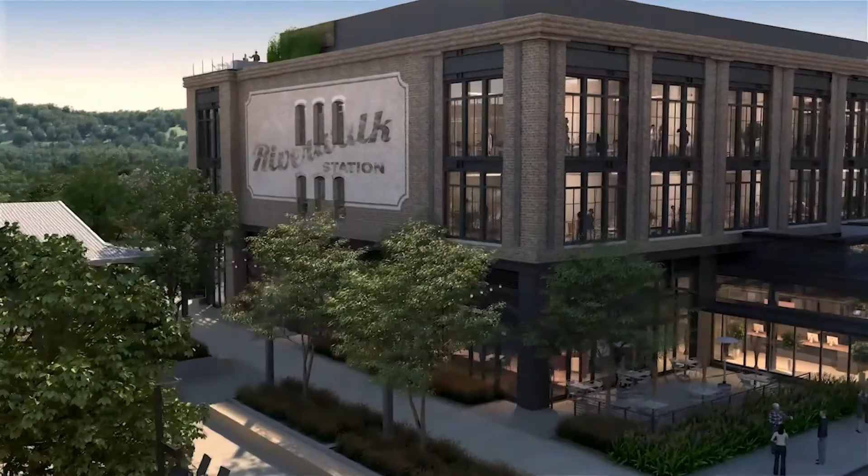Good afternoon, everybody. My name is Eric Hepfer. I'm with Hines, and we are thrilled to be in front of you talking about Riverwalk today. It's been a long time in the making. We at Hines have been working on this project for about 4 years, and as Pete will share with you, there's been a vision for this site that's about 30 years in the making. Really exciting. There's been a lot of twists and turns along the way, which we'll talk about and share some of the stories with you.

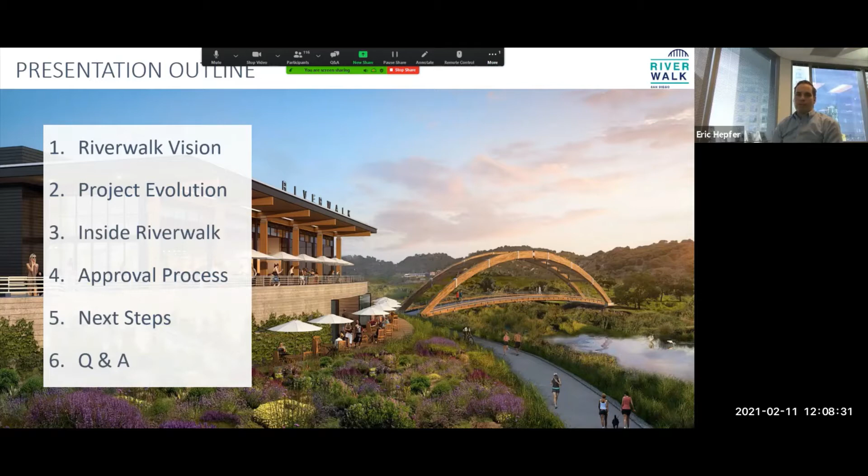As Bora said, we aim to be San Diego's first truly transit-oriented village, which means we want to redefine the way people think about public transit and their car. The way we do that is to integrate transit into the heart of the project and make it a front door experience rather than a back door experience.

Many projects that have been done, you have to walk out, walk through a parking lot, maybe up some stairs, and get on the train. We wanted to bring the train right to the center of the project so it would be easy and convenient, and also build a place around the transit stop where you might want to go, to make it an attractive place to be.

We want to prove that in San Diego a transit-oriented lifestyle is not only possible, but it actually could be preferable, especially at a place like Riverwalk, where you're minutes away from the major job centers of UTC and downtown. This is an overview of the project at its high level.

To hit it again: 4,300 residential units, 1 million square feet of office, and 150,000 square feet of retail, all around nearly 100 acres of parks and open space. We think this really gives us an opportunity to do something special.

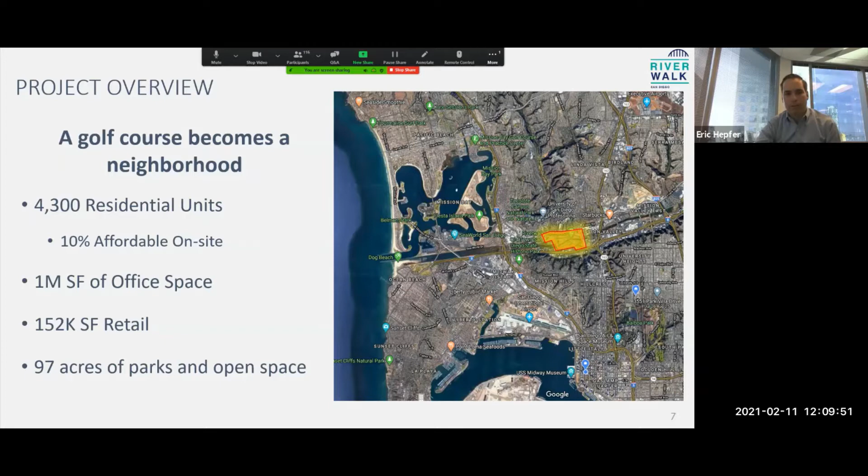So we'll talk about the objectives of the project now. We talked about transit. The next thing we want to do is really create a sense of place and community. We want Riverwalk to feel authentically and organically San Diego, like it's been there forever and ingrained into the neighborhood.

And that brings me to the next point: we want to fit with our neighbors. A big part of the approval process was making sure that we were respectful of the community around us, so that Riverwalk fit in instead of really sticking out.

Next, we want to enhance the environment. With the San Diego River running through the project, we get to restore the San Diego River environment, which is really exciting. We also get to make a major dent in our city's climate action goals by building all this housing on transit.

And finally, we want to address the housing crisis. The BIA is on the forefront of this, and we as developers have probably the best avenue to address our region's housing crisis by adding more housing, and that's exactly what we're going to do here at Riverwalk.

So with that, I'll turn it over to Pete to take you into some of the details of the project and its history. Yeah, thanks, Eric. Riverwalk is a project that Hines has been working on since 2016. We entered a partnership with the Levi Cushman family that has owned this site, which has been in various forms for over 100 years. Hines partnered with the family with the express intention of creating the Riverwalk development.

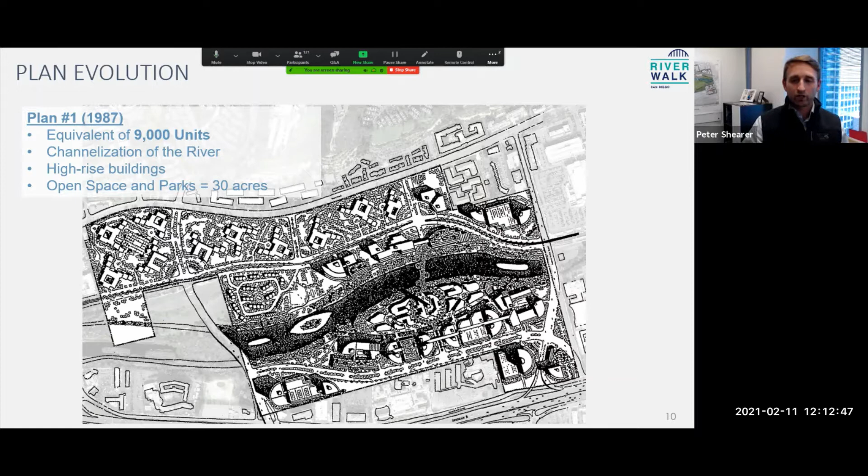Various fits and starts for about 20 years until the early 2010s when the Related Company came in and looked at the site. This is a hand sketch of their plan. You can see when the next developer came in, it became a more residential development, but one thing that sticks out to me is how much development there is in and around the San Diego River, and the network of buildings is much less walkable than what we envisioned. The density did drop by about a third.

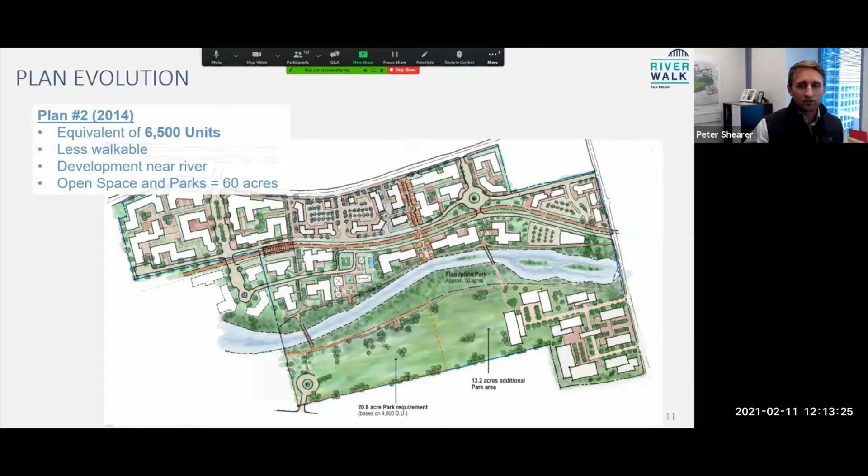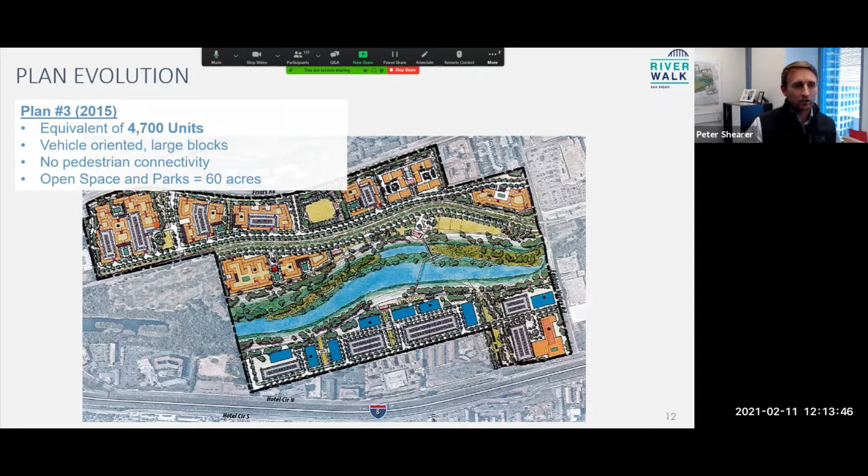Then the next plan was from the Irvine Company in 2015. This is largely residential with a number of low-rise surface-parked office buildings to the south of the San Diego River. Again, less open space, but I think the defining characteristic of this plan is just its lack of walkability—huge super blocks of residential construction along Friars Road.

So for our first plan in 2016, we started our process with the plan you see in front of you today. It was the equivalent of about 3,000 residential units. As Eric mentioned, we're at 4,300 today, so I'll talk through how we got there.

The first thing we did was try to make this a walkable place. Mission Valley serves many purposes right now, but the number one purpose it serves is the vehicle, and we want to turn that on its head. We want Western Mission Valley to be pedestrian oriented and pedestrian friendly. So how do you achieve that? You divide those super blocks into smaller blocks, and that's what you can see here on this plan.

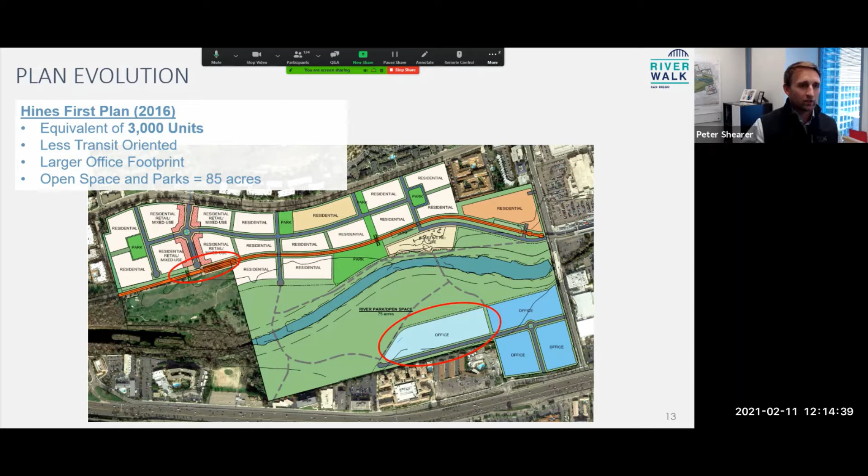For a number of reasons, we had the retail core, the town center—we'll walk you through what that looks like today—over on the western edge of Via Las Cumbres, and the transit stop there.

In conversations with the city and with the community, this plan morphed over time, and I'll walk you through those changes quickly. The first major change we made was moving the transit stop to the center of the project and moving the center of gravity, the retail town center, around the transit stop—really anchoring the development in the middle so that this whole neighborhood becomes transit oriented.

This was the plan in front of you when the just-adopted 2019 Mission Valley Community Plan update was released. We were in the process of planning for what we had shown before, and the Mission Valley Community Plan update came in and added a substantial amount of density to Mission Valley. The city's goal was really higher density development, especially along transit, so they pushed us from a plan that was 3,000 units to a plan north of 4,000 units, and we found a way to accommodate that.

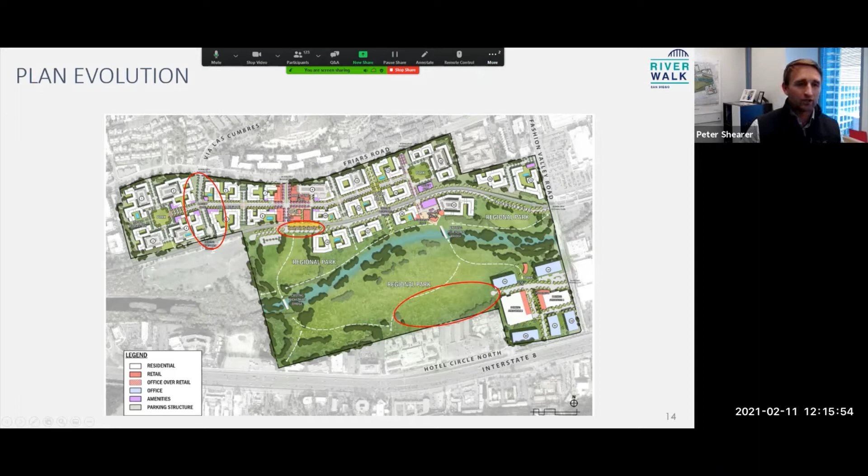Notable at this time as well, in conversations with the stakeholders of the San Diego River Park Foundation, we got rid of about 13 acres of developable land south of the San Diego River that is now going to be park space.

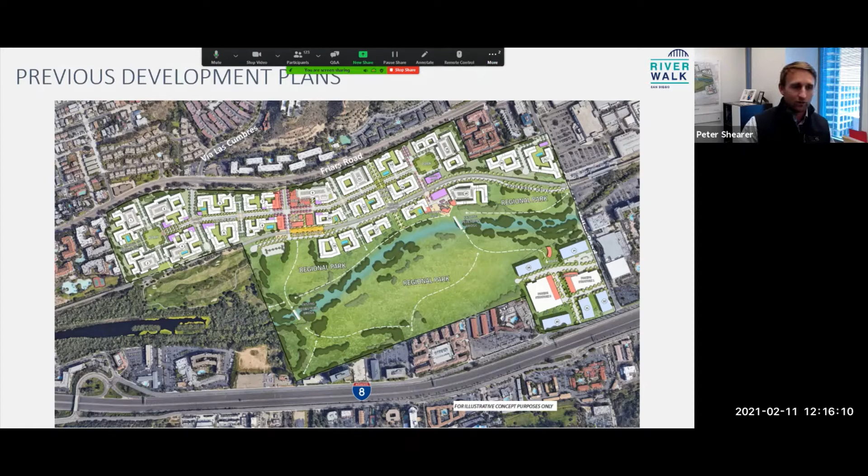So I talked about the Mission Valley Community Plan update, and a big component of that was one major road called Via Las Cumbres. Ted, are you able to talk a bit through the history of Via Las Cumbres and how we solved that problem?

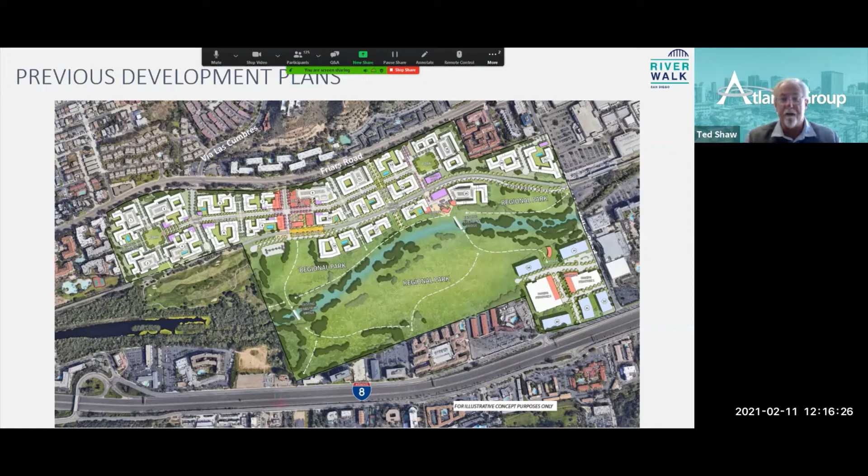Yeah, happy to. Thanks, Pete. So for those of you who've been around for a while, you'll know that Via Las Cumbres, as Pete outlined, was put into the Mission Valley Community Plan. In the 80s, Interstate 8 and Friars Road were heavily trafficked during rush hour, principally because they were the major east-west roadways cutting through the city. You didn't have State Route 52, so there was lots of congestion on Friars and Interstate 8.

It never really got past this level of design at that time. It was put into the Levi-Cushman specific plan, but again, it wasn't really designed. So as part of our discussions with the city, we went back and started asking questions about why, what was important, and how it could happen or not.

Obviously they wanted the roadway in because they still saw value in having that connection across the valley. We went back and looked at it, talked with our neighbors, talked with MTS because they have the trolley tracks, talked to the Public Utilities Commission because they control the tracks. We basically had three opportunities to address the road in that location, north-south.

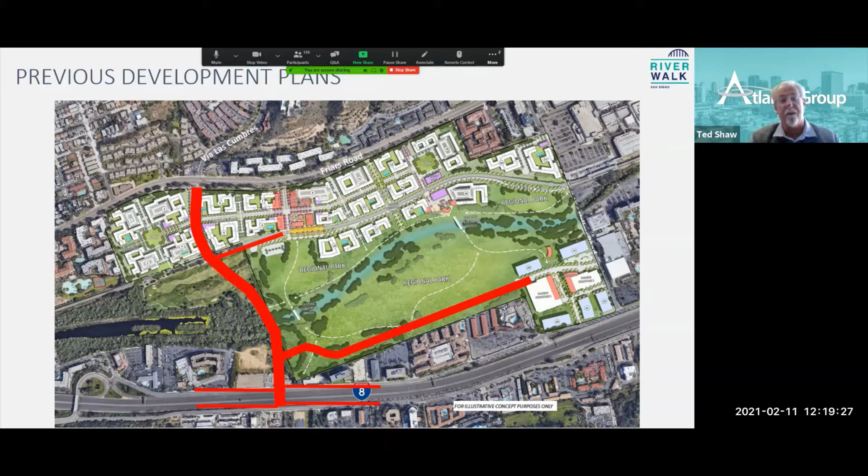Having that point of disagreement, Hines and the team went back and looked at an alternative that might achieve the same goals without a big fight on the council floor and at Planning Commission. Ultimately, through hard work by the team, we came up with a location where the town center and retail core is, where we could actually tunnel underneath the tracks and stay out of the floodway, reducing the length of the bridge from where it says River Park, below the transit stop.

So the bridge is significantly shorter. It does a couple other things—it saves money, it's now a narrower bridge, it avoids bifurcating the MTS property which is just to the west near that left-hand oval, and it avoids going through the MTS wetland mitigation on the south side of the valley.

With the Hines project, they will build the road down to the point where a bridge would start off. The remaining road is a regional facility, and Hines is committed to work with the city, since it's designated a regional road, to come up with methods for funding that roadway in the future. Future work will still be needed on final design and environmental clearance, but it's a far superior solution to the significant structure that would have been Via Las Cumbres.

Yeah Ted, thank you for the background there. One thing I'll say is the conversations with the city all along the way were productive and problem-solving—a testament to Mike Hansen and Elyse Lowe and everyone at the city of San Diego, to find a solution that really worked for everyone.

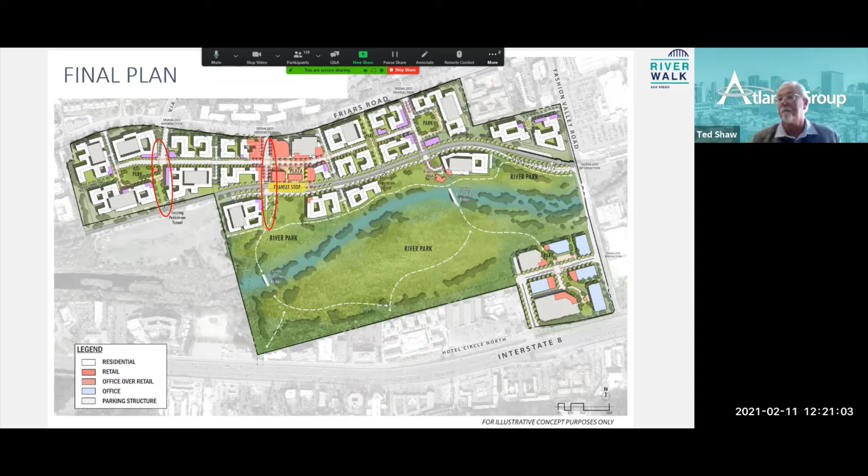Because what would have happened with the original Via Las Cumbres plan was you'd take this beautiful walkable community, this paradigm shift of transit-oriented development in San Diego, and put the whole thing under a freeway overpass. That just runs counter to placemaking, to pedestrian orientation, and also counter to really celebrating transit. So we're happy with the solution we came up with here.

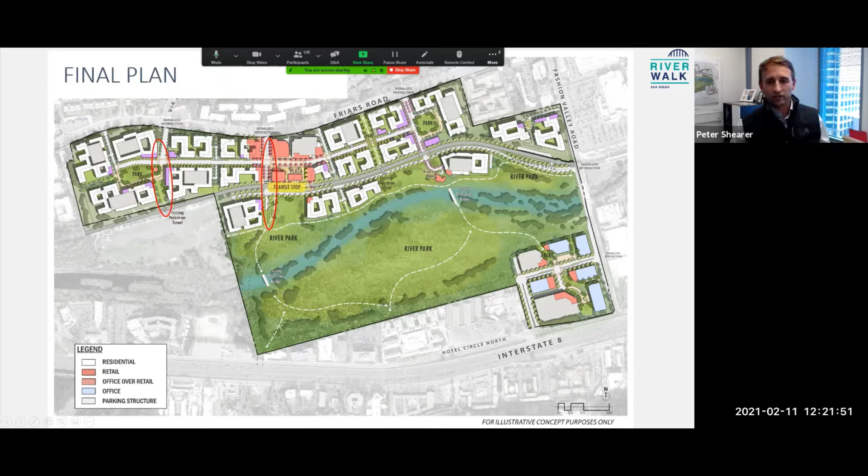This was ultimately the final change to our site plan. It required us moving a couple of the buildings on the south so that the future Via Las Cumbres, or now Street J, could come through and feel like part of a neighborhood, as opposed to just being in the middle of the park. It also allowed us to create a better pedestrian orientation on the western side of our property. So we're excited about that solution, but it was a major engineering hurdle that our team came through with the help of Ted, working with the city of San Diego.

So here is the land use plan that we have today. As I mentioned, this is built on the backs and input of stakeholders—three critical groups: the local community and neighbors, the San Diego River Park Foundation, and the city of San Diego. From there, we created these proposed land uses. You can see residential on the east and the west, next to where the residential on the western side of Mission Valley exists today.

And then that red around the transit stop becomes the mixed use Main Street core. We'll show some images of that in a second.

You can see that about 100 acres of the property, about half the property, will be maintained as open space into perpetuity, creating one of the largest parks in San Diego history and providing 30 acres of dedicated habitat restoration around the San Diego River.

And then finally, rounding out the mix of uses, adding an employment hub to the southeast corner, which works for a number of reasons, but one of them is, from a traffic standpoint, immediately adjacent to the I-8, direct access, makes for much better traffic conditions for Friars Road.

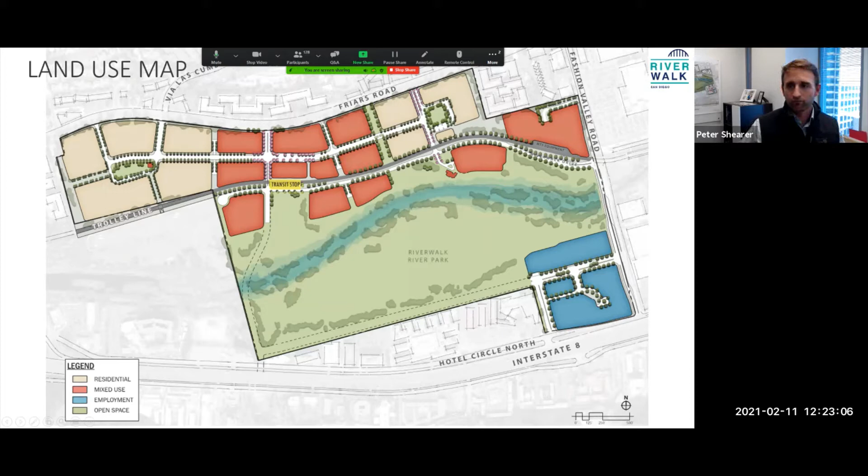So we'll fly through some images here, and then Eric and Craig can talk you through the approval process and what happens next. So to us, we've talked a lot about it, but this is more than just a transit station.

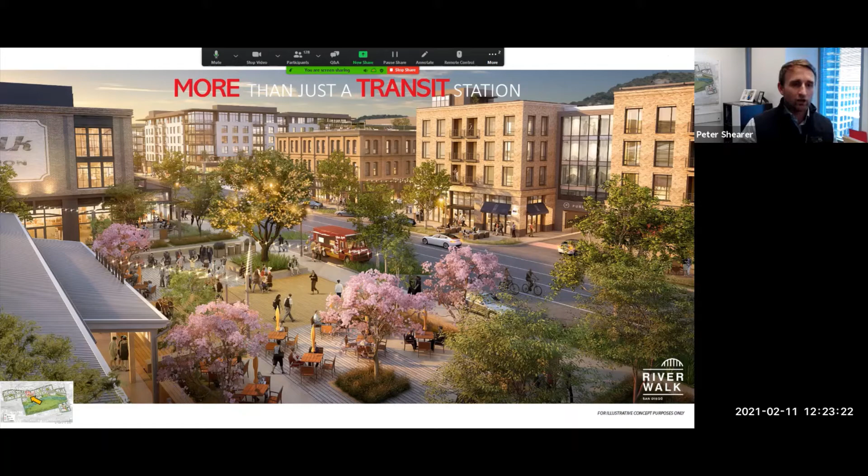We want to be the mixed use plaza, the heart of the development, really a gathering place for Western Mission Valley. We envision hosting farmers markets here, open air movies, live music on evenings and weekends.

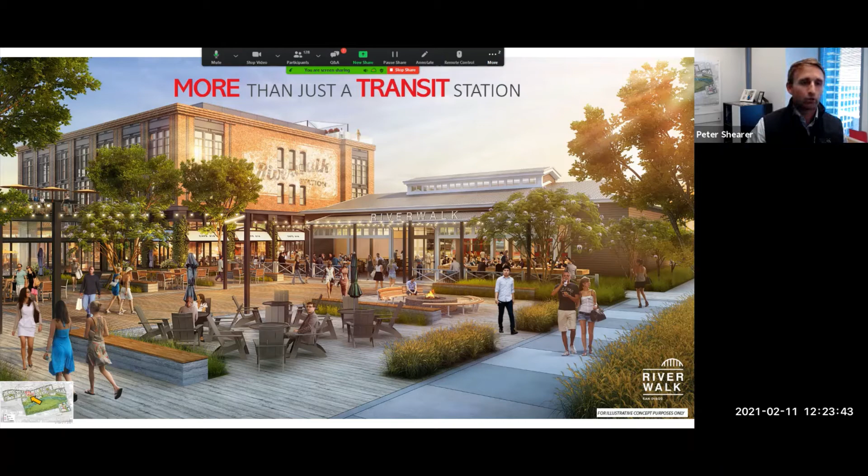And we really believe that in order to change mode share, to get folks to use transit, to embrace transit, you have to activate those trolley stations, and you got to make that trip purposeful for them. So this is how we envision our transit station. I hope it looks a little different than the ones you've seen around town.

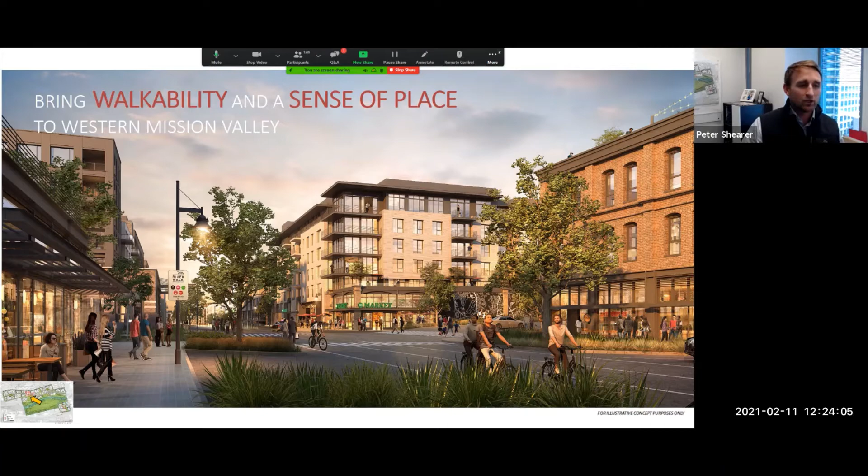Branching out from there, the entire development is really built around the pedestrian experience. We want to bring walkability and a sense of place to Mission Valley. So everything is designed at the human scale. It will prove, like Eric said, that a car-free lifestyle is possible. We really believe it's preferable as well.

Another image of that is sidewalk cafes, the interaction of the mix of uses with residential above the retail, really something that Mission Valley has not had to date. But with its location in the center of the city, we really see this as a place that is going to be redefined and really be one of the great places, the great neighborhoods of San Diego.

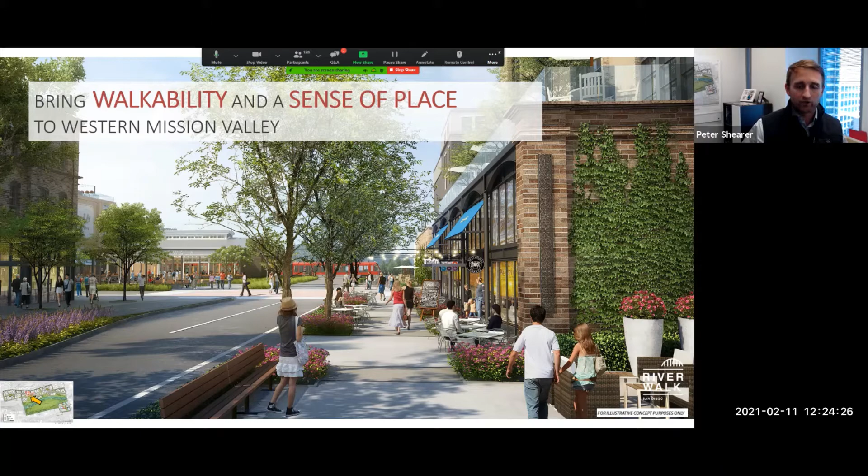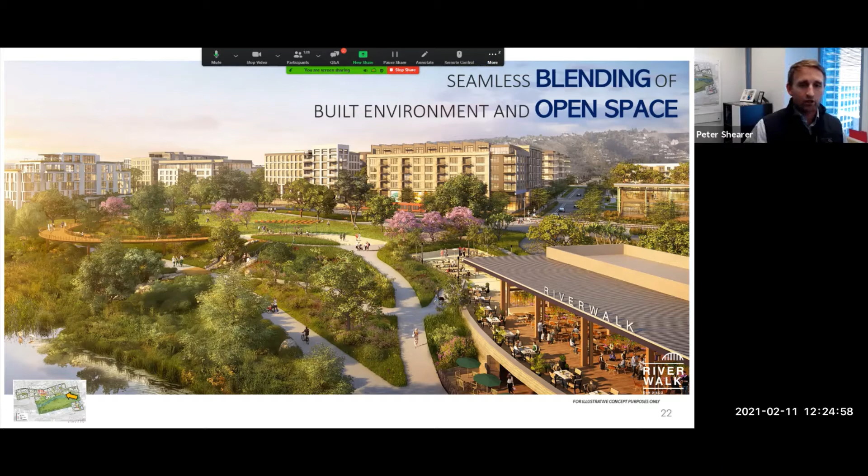So here you can see a rendering of the extension of the San Diego River Trail, that we will repurpose our golf course clubhouse immediately to the north of the river trail and create a node where folks can come and have a beer or lunch while walking or biking along the San Diego River Trail.

We think that activation really brings to life both the trail as well as the retail, and that synergy makes the parts better than, or makes the sum better than the parts themselves.

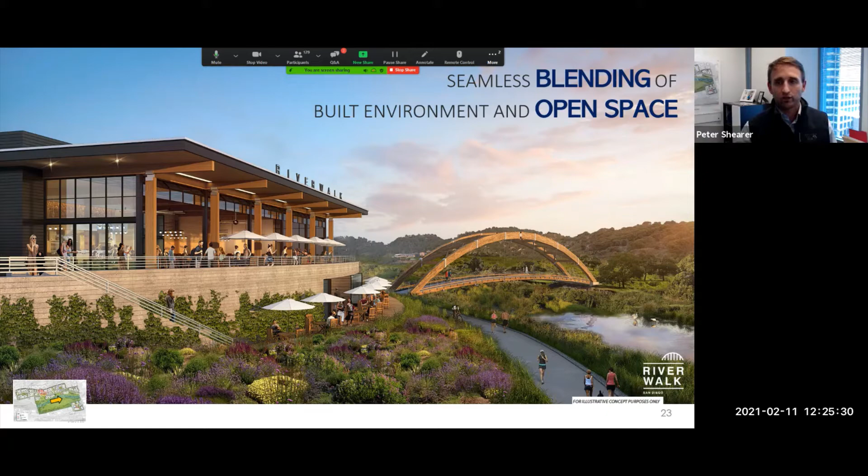So the existing clubhouse here has a great future. This is the location immediately adjacent to the San Diego River, something you couldn't build again today. And we're excited about repurposing this as a brewery or restaurant concept, looking over the 80-acre park and the San Diego River as well. And we hand it over to Eric, and you can talk through the rest of the development, Eric.

Great. Yeah. So we want to talk for a minute about housing for all incomes, but also all generations. So we envision that there might be a senior component to Riverwalk, which we think could be really exciting.

And then we want Riverwalk to be accessible to people of all income ranges. And so we have committed to doing 10% of all of our units as affordable on site. So that's 430 affordable units, which will make Riverwalk one of the largest affordable housing projects really in San Diego.

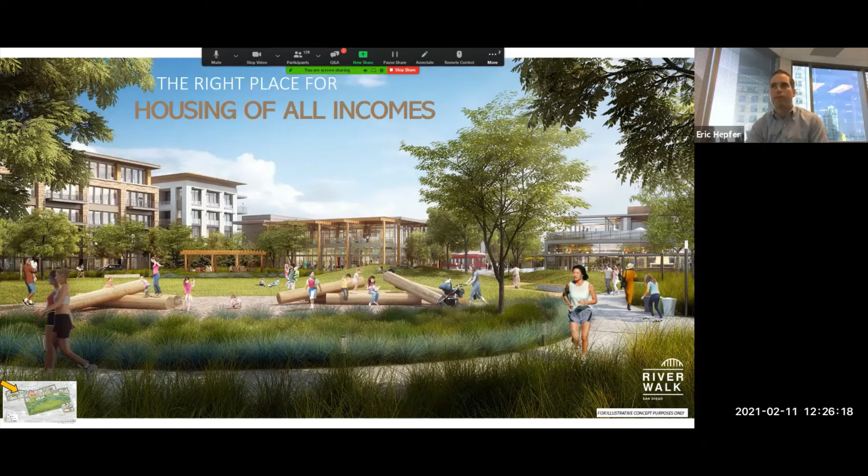And I'll point out here that the affordable units are going to look exactly like the market rate units. And so it's going to integrate seamlessly into the project. And we think it's really an exciting opportunity to get people into homes, into a great community. So we are proud of that. We'll run to the next slide here for a minute.

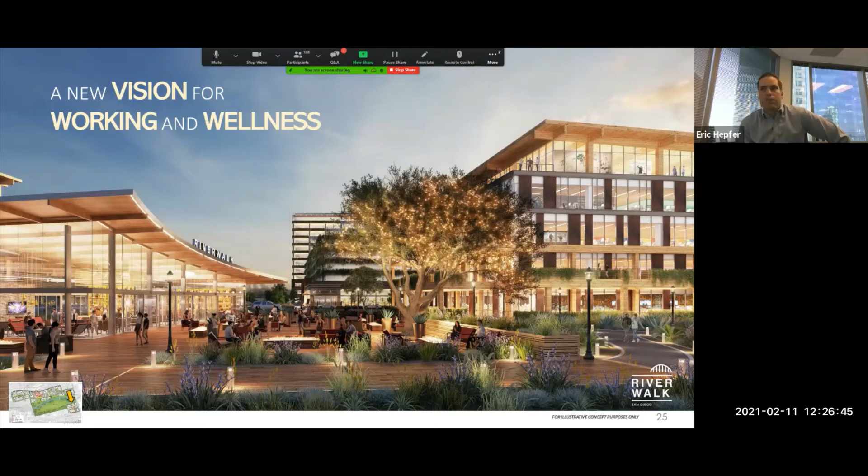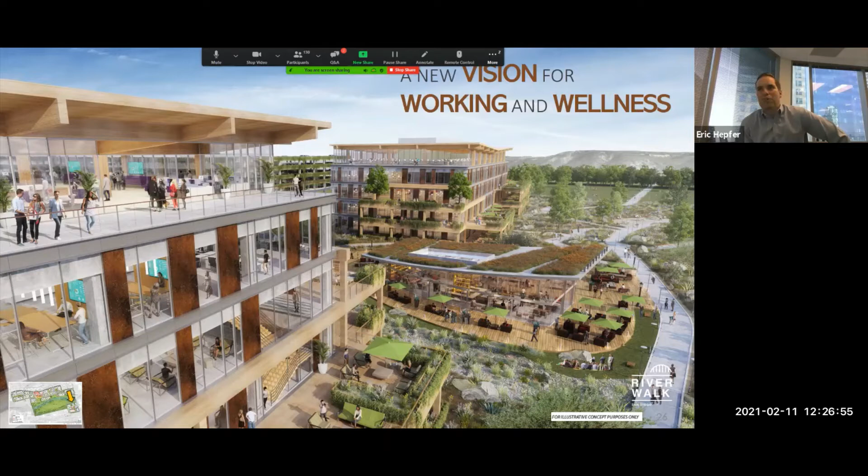We've built several of these around the country, and they've been highly successful. They feel like an old warehouse brick and timber office building, but function like a state-of-the-art, highly energy efficient and space efficient office building. So this is what we're envisioning for the office component of our project, and we're very excited about the future of Mission Valley in the workplace for these projects to come.

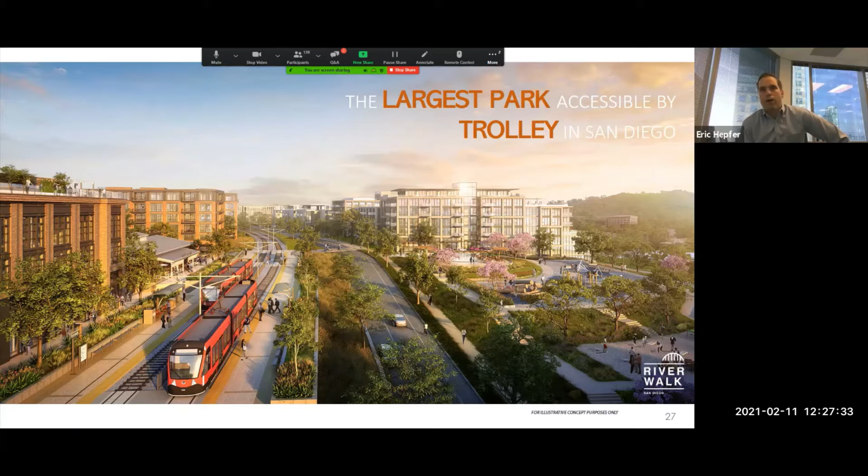And then, finally, we're building the largest park accessible by trolley in San Diego. We think that's important because not everybody has the ability to hop in their car and drive to some of the great parks in the city. But if you can get to a transit stop, you can get to Riverwalk, and you'll be able to walk off the train and walk right into what's going to be, we think, the jewel of Mission Valley, and be a phenomenal place for people to gather, to recreate, and to just experience life together along the San Diego River.

So with that, I'll turn it over to Craig, who's going to talk a little bit about the approval process and how we went about that.

Thank you, Eric. As with anything, a project of this size, any development project, as you all know, is very difficult to get approved in normal circumstances. In this particular case, it's a very large project in a very central part of San Diego, so there were a lot of eyes on it. Obviously, you go through the planning group and the subcommittee process to get input, but there are other stakeholders, including neighbors and other stakeholders beyond the neighbors, that care about something of this size and nature.

So we took a very proactive approach in engaging the community. We wanted to help them, help us basically make a project that was a combination of all of their interests and needs, as well as the economic needs of the developer. And so we did that over a 3+ year period of time. We held over 30 community meetings.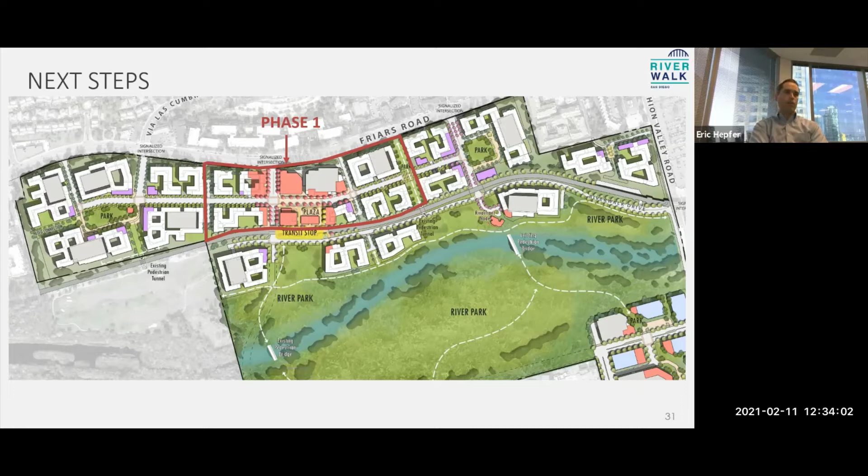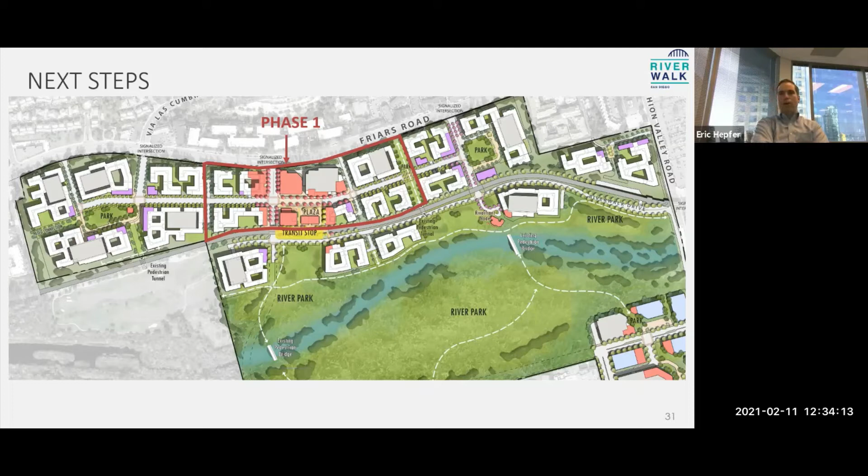Another question was, is this leasehold or fee simple? We do own the land, fee simple, in our venture with the family Pete talked about at the beginning, and that's how we control it. So that's what we're envisioning for phase one, and we're looking forward to making Riverwalk a reality so we can meet you all there for a beer or a coffee. With that, we'll end our formal presentation and would love to answer any questions.

Okay, then I will be taking over from here. So thank you, Pete, Eric, Ted, and Craig. And Craig, boy, we really trained you well at the BIA - I'm such an admirer of your work.

The question that appeared at the top of my screen was: it doesn't appear there is an additional or enhanced on-off ramp for I-8 east and westbound, as was the plan with the expensive Via Las Cumbres bridge. Did I miss something? I can take that one, Ted.

Feel free to chime in as well. There is an extensive amount of study that needs to go on there before we're able to determine the right solution. And I say 'we' here - it's really a team effort with the City of San Diego, Caltrans, MTS, SANDAG, and then the local neighborhood.

That's a process that Hines is going to kick off early in our development. We will be fully funding a project study report in conjunction with Caltrans and the City of San Diego to identify the final solution for I-8 west of the 163 all the way down to the I-5. It's not just a Via Las Cumbres conversation. When you start pulling that string, you get into the hook ramps on I-8, and from there into Hotel Circle, which is meant to become a one-way couplet in the Mission Valley Community Plan. There's this integrated system that all needs to be designed, and Hines is going to take the lead on that as we start this development.